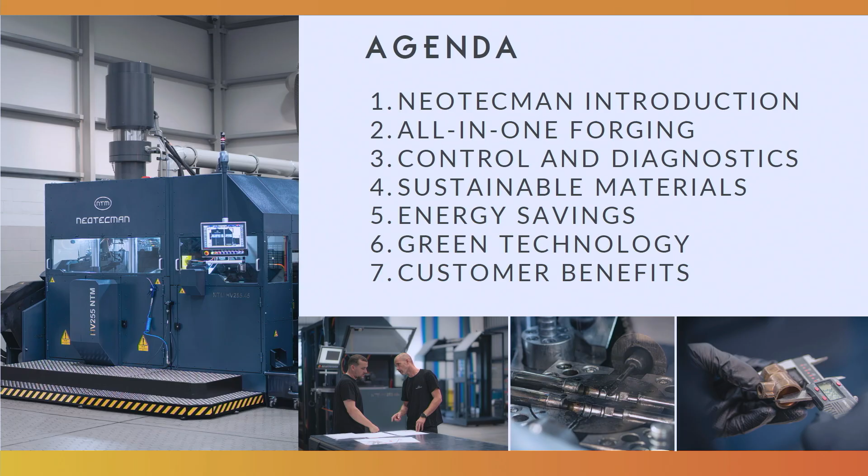The first thing I want to talk briefly about is the company itself. Neotecman was founded about 35 years ago by people who came from the background of forging. The founders of the company were actually forgers, but they were pretty displeased with their machinery, so they started modifying these machines, to such a point that they created a completely new machine. This new machine is the result of years of investigation, but the important thing is that it comes from people of the industry, people of the company. So the founders of Neotecman knew what forging means and knew what the needs of the forging industry were.

Now we have 2 production plants in Girona, near Barcelona, Catalonia, Spain. We have 130 or more references in the world. That means we have 130 machines actually currently working. It may sound like a small number, but think that we are oriented to a very niche, very specific market.

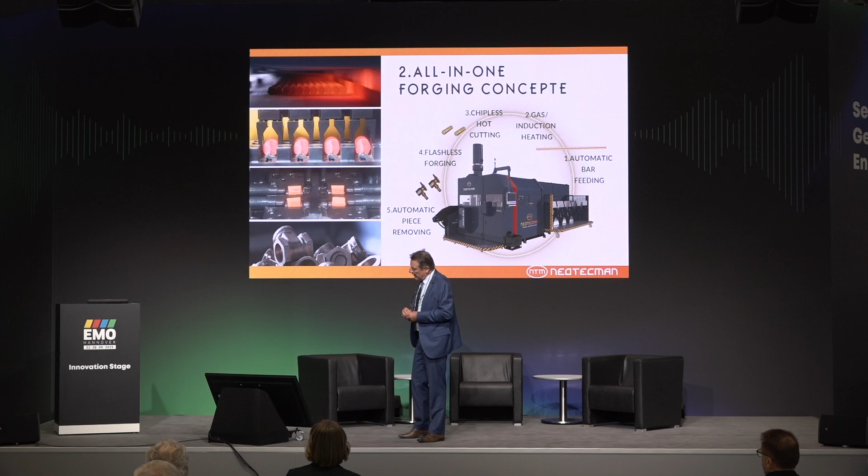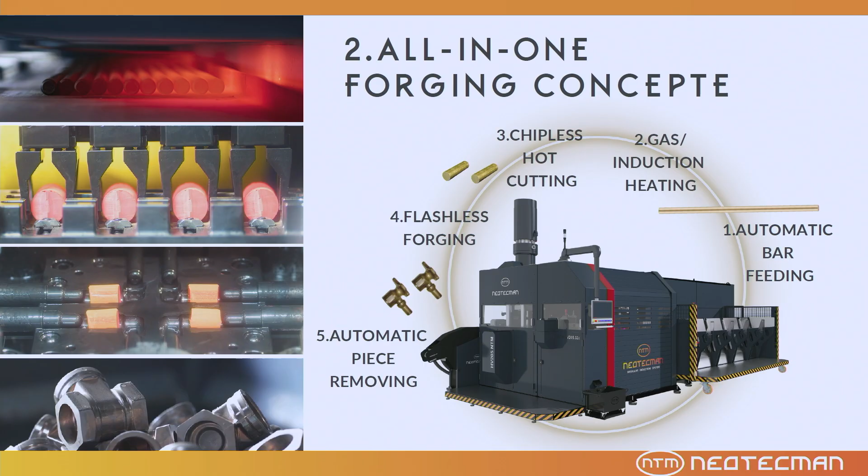So, the all-in-one forging concept. What do we mean by all-in-one? This is what we are going to see now through a little video. But before we start the video, by all-in-one, we mean just one machine that will replace all the circuit, the traditional circuit from traditional forging.

Traditional forging usually meant taking bars, brass bars, aluminum bars, cutting them into billets, spraying or plunging those billets into a graphite oil, bringing them into a furnace, then into the press, forging them, and then clipping them because there is flash all around it. This concept required anything between 3 and 8 people, required several areas in the factory, and required quite a lot of energy and time.

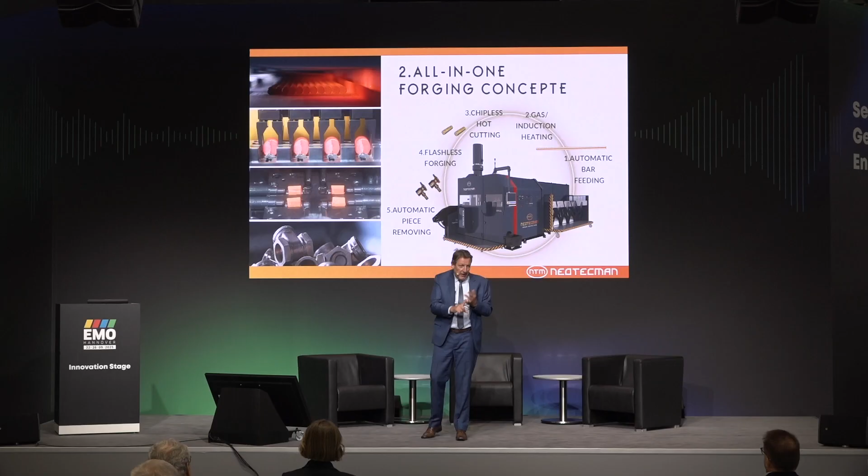With our all-in-one concept, we have reduced this to a small area of the factory. The basic machine is 4 by 5 meters, so we're talking about 20 square meters in the factory, which is very limited. We go from the long, cold bar straight into a part, flashless, forged, ready to be machined, in just one operation. We will heat, cut, and forge flashless. So just one person can handle one machine and replace 8 people and 5 machines. This is what we call the all-in-one forging system.

Now we will see the little video, and you will see that with one machine, we will go from the long bar to the part, forged, flashless, and ready to be machined.

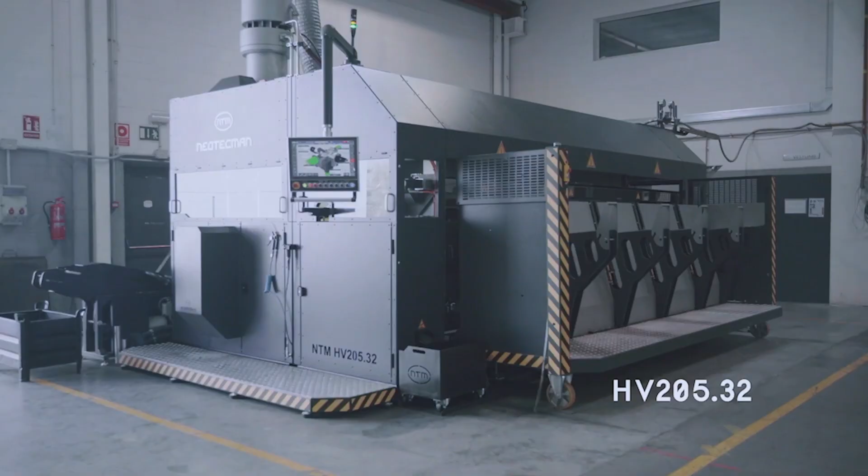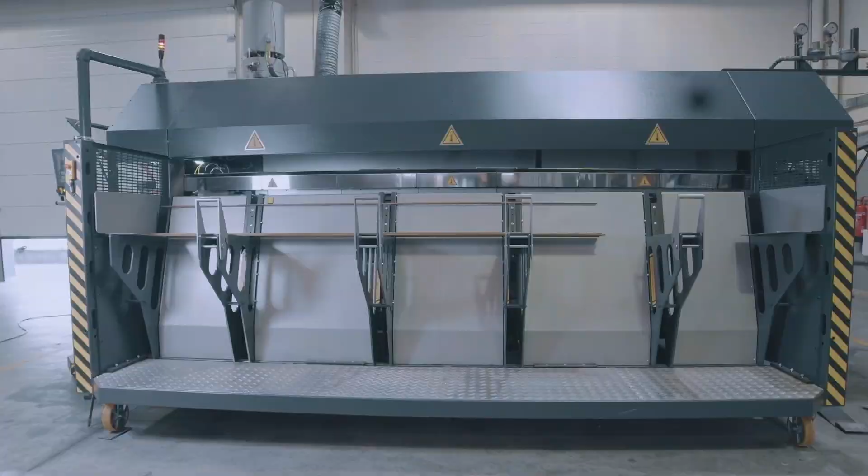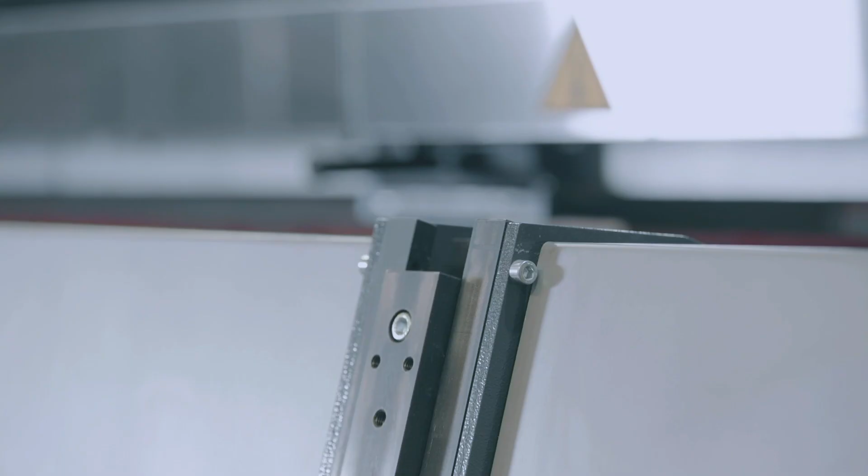So on one side of our machine, we bring 1 or 2 tons of long bars, and those bars are taken one by one and brought into the furnace. Once loaded into the furnace, they start heating. But we heat the whole bar, we do not heat billets, and we heat several bars at a time. So we save a lot of energy. The same energy used for heating a few billets is now used here for heating many bars, so there's an important savings on energy at this stage.

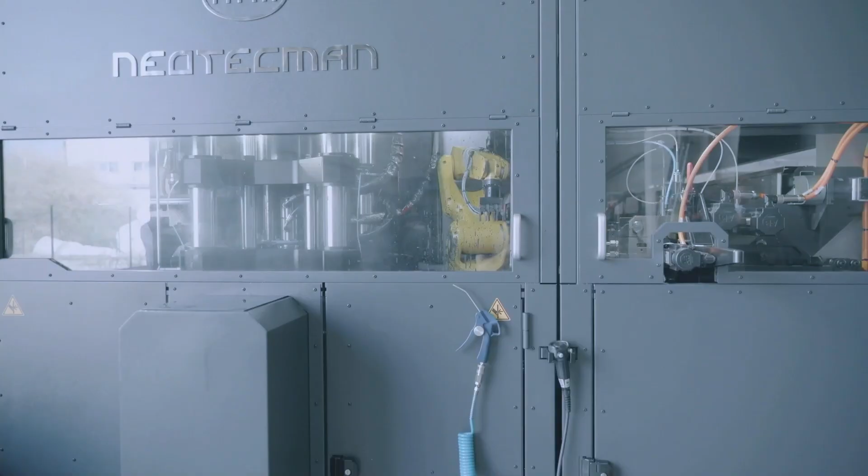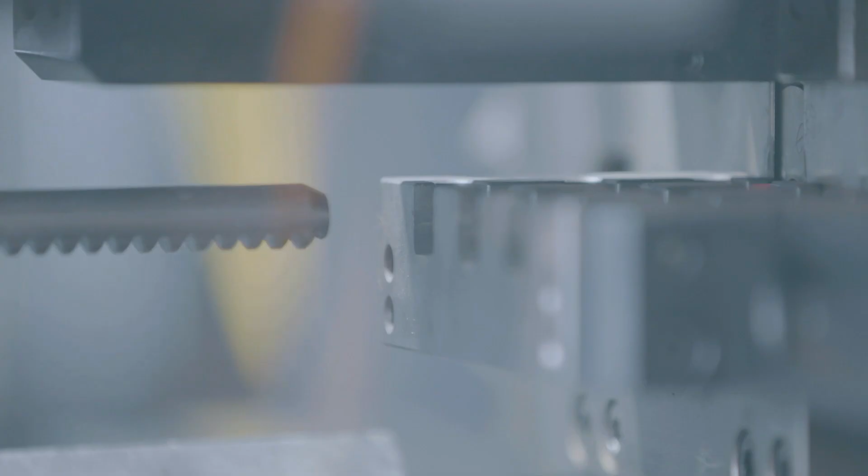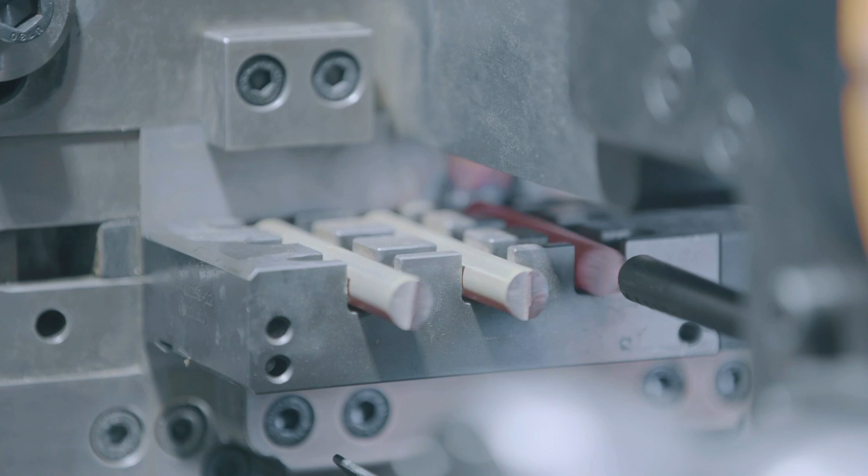Once a bar is hot, we push it from behind, and on the other side we receive it and determine its exact length. Once we've determined the length, we shear it, and when we shear it, there's no chip, no waste, no material to be recycled. It's a clean cut, always the same, at the length we've decided. The length means the exact weight and quantity of material we need. This is what enables us to forge flashless. We can adapt that length at any time with the machine itself, we can adjust it.

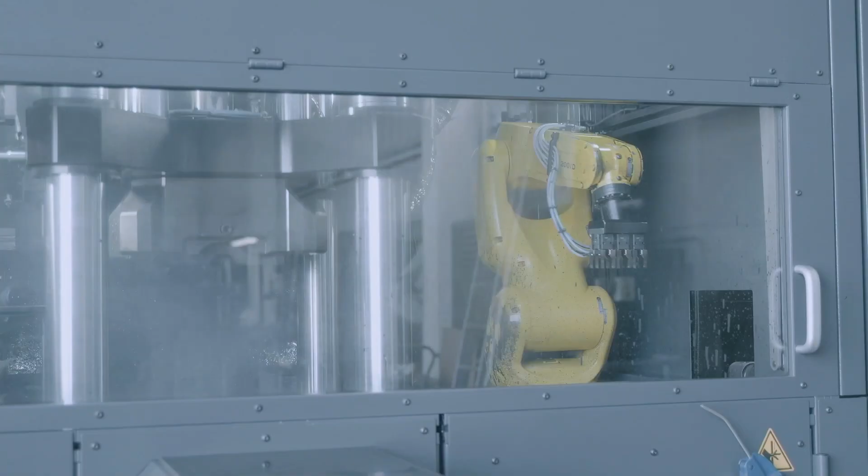Now, once we have our hot billets, we bring them onto the die, and inside the die, once it is closed, our punches start spreading the material around. This is why we do not have flash. We are not smashing the billet, we are spreading the material inside the die to make sure it goes everywhere we need it, giving the perfect shape to our part.

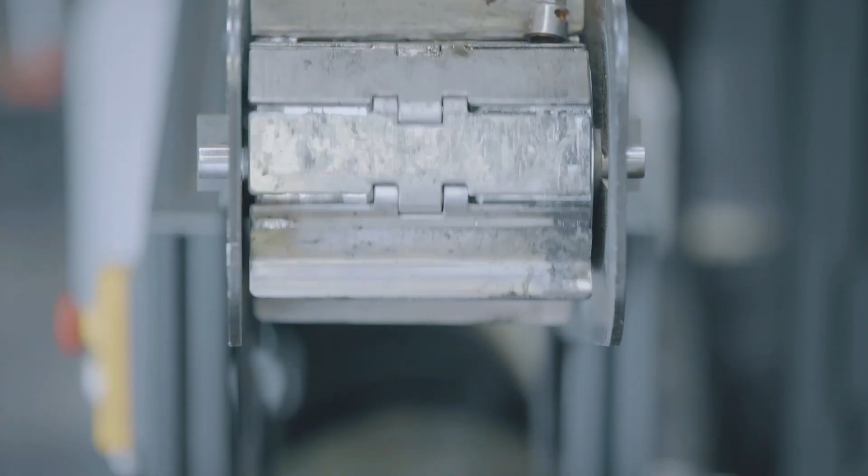And once it is forged, we retrieve it from the die and collect it. You can see that we forge flashless. If you look at the parts, there's no flash. That's how the parts come from the machine, they do not need to be clipped. So once again, we save material because we don't have any flash to recycle. We don't have any flash, we don't have any chips, so we save quite a lot of raw material.

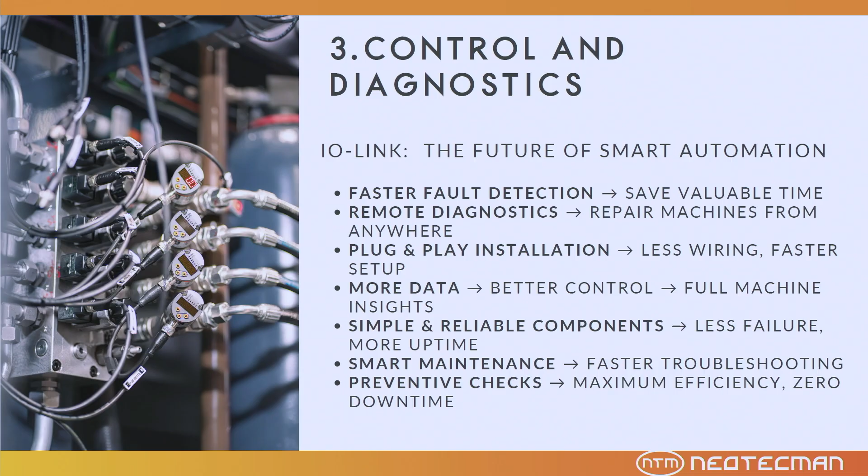Not only do we have one compact machine, but inside the machine we use new technologies like IO-Link. For the last 3 to 4 years we've been developing our machines using IO-Link more and more. The IO-Link system is essential for communication, and this enables us to detect problems in the machine much faster. It allows us to have remote diagnostics. We have much more information on what's going on inside the machine through this IO-Link, so we can understand much better what is happening, what is failing, and react much faster.

It is plug and play, a lot easier to install than typical wiring from all the elements towards the PLC or the computer. We get more data, a better understanding of everything, and it is made of simple and reliable components. So altogether, it's a big win, both for us the manufacturers, and also for the customers, and for the service team who checks and fixes all the problems we may have.

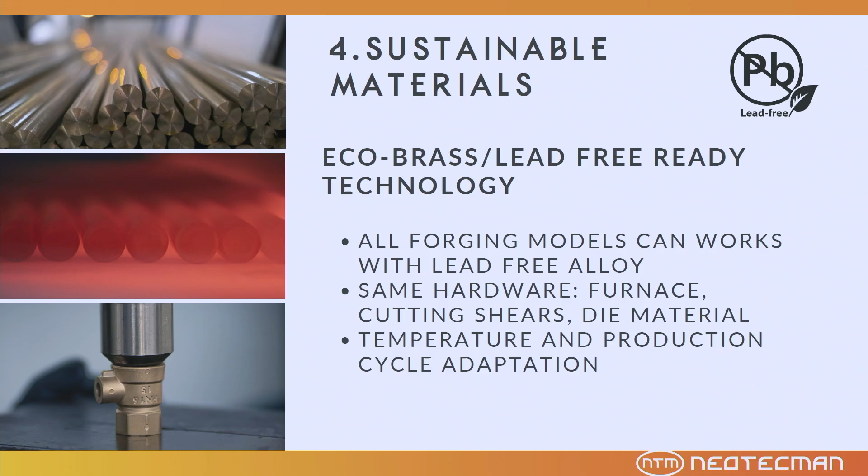This machine is built in a way that there is no need to change anything if we want to use eco-friendly material. We can work without any problem with lead-free brass, lead-free material. It's just a matter of adapting the speed or the times, but all the equipment by itself can be used for lead-free brass or whatever material. We need to adapt the temperature and the cycle times.

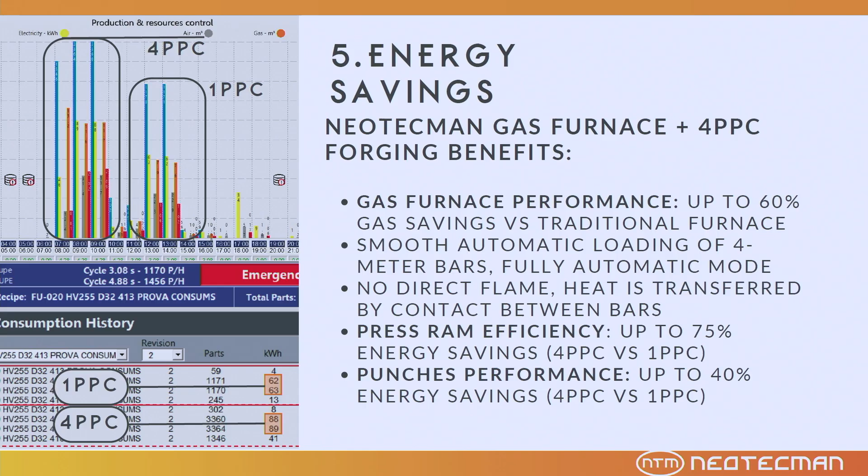We have two sources of energy. We can heat the bars, as you've seen in the video, with gas, or with electric induction. If we use gas, we try to save as much as possible. We heat up a lot of bars at the same time, so we share the same energy for a lot of billets, for a lot of parts.

Not only when we heat, but when we forge, we have developed a machine that allows us to forge up to 4 parts at a time. So all the energy used in the machine is shared between many bars on one side and 4 parts on the other. It does not take 4 times more energy to heat and forge 4 parts than 1, it just requires a little bit more. So we save a lot of energy when we can forge 4 bars. The difference between 1 piece or 4 pieces per cycle is only a little bit more energy necessary.

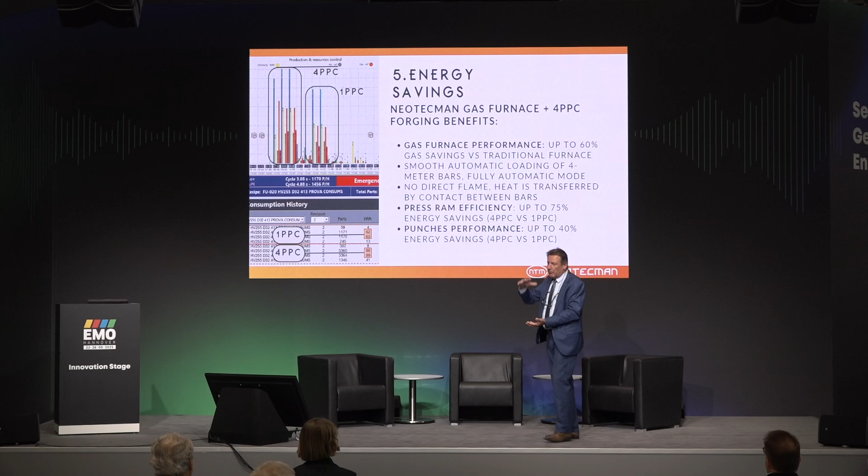The fact that we have the same power used for the ram and for the punches helps us a lot to save and control the energy. Thank you.

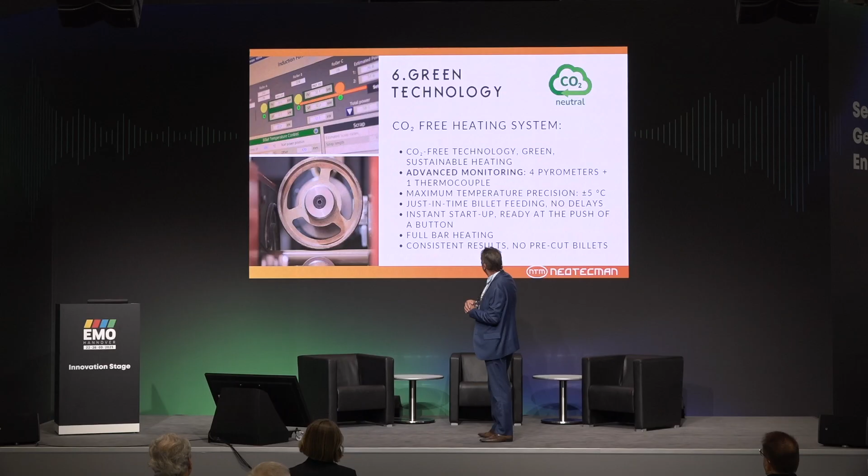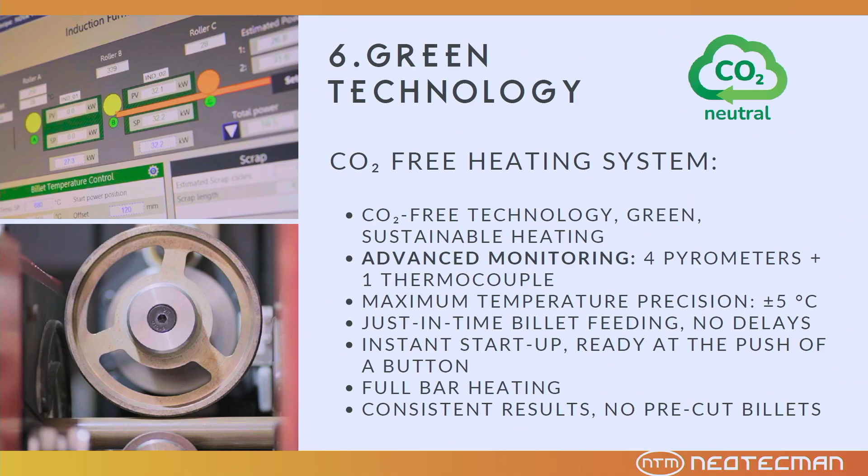As I said, we have a gas heating system or an electric induction heating system. Obviously, electric induction is a CO2-free heating system, so it is green, and this leads us much more towards Industry 5.0.

We have very good control of energy with the use of 4 pyrometers at 4 different points inside the machine. We can control the temperature and make sure we are controlling it. With our induction heating system, we can guarantee ±5 degree stability in the temperature. This, once again, is a great help in controlling and saving energy.

With this technology, we do not need to prepare the machine beforehand. We do not need to heat the machine 20 or 30 minutes before. It is instant heat. You just press the button, and after a few seconds, maybe 1 minute, you've got the first part absolutely finished. So it is once again all oriented towards Industry 5.0, saving energy, working greener, and this is how we contribute to that.

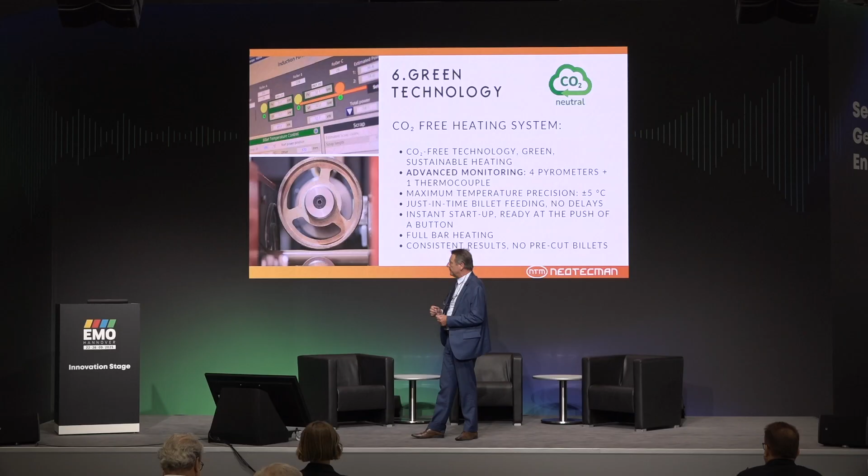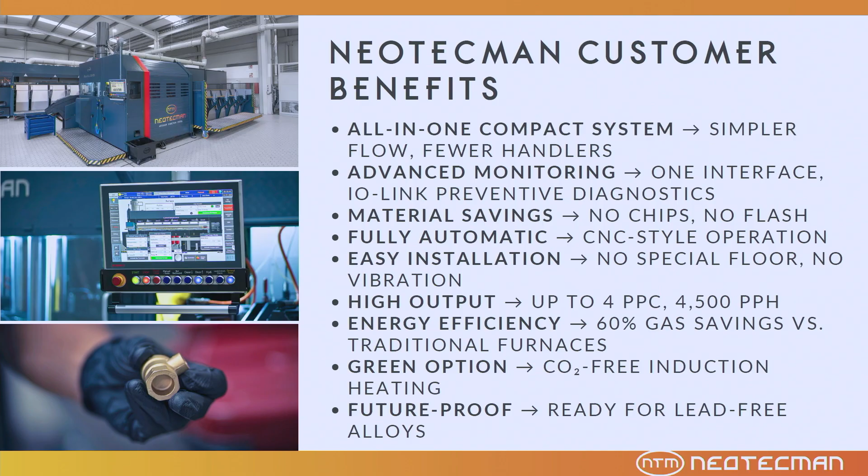So altogether, the benefits for the customer are the fact that it is all in one, there's only one machine to handle, and very few people, because one person can handle up to 2 machines, so it is a lot simpler. The infrastructure is a lot simpler, reduced space, reduced personnel. We have much better control, advanced monitoring, and a powerful IO-Link interface which gives us a lot of information that helps with diagnosis, repairing, and solving of solutions.

We save a lot of material, no chip, no flash. Just that will help pay off the machine in 2 to 3 years through material savings alone. It's a fully automatic installation, so this is also very important. It's a machine which is easy to install. We do not need any heavy work to install it. The machine is just laid on the floor. It's a very easy process.

As I said, we have up to 4 pieces per cycle, so we have high energy efficiency. We have machines that can produce 4,000, 4,300, 4,500 pieces per hour. Energy efficiency, green options, this is really our way of seeing the future of forging. And our motto is: the best way to create the future is to invent it.

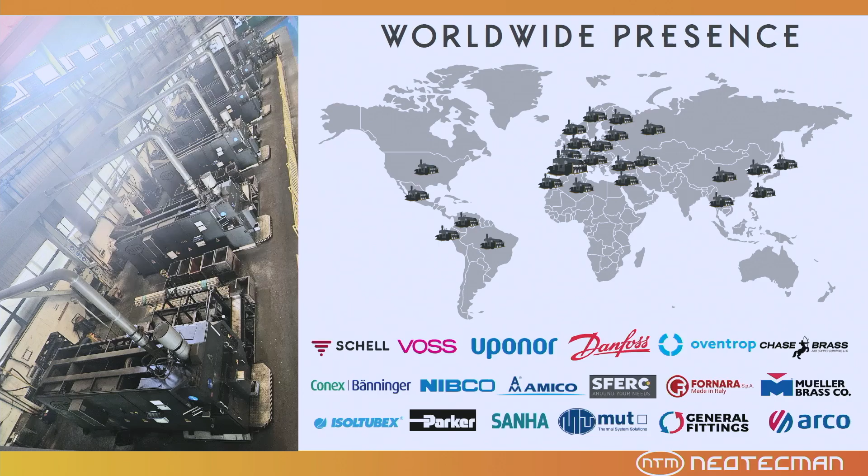I thank you. We have machines all around the world, except in Australia. We still don't have machines there, but we have machines in Africa, in America, north and south, and in Asia. Here we have a Chinese company with a few of our machines. We are getting there more and more, and we are happy to share this with 130 customers.

We thank you very much. If you have questions, I'm sure we will find a solution, we will find an answer.